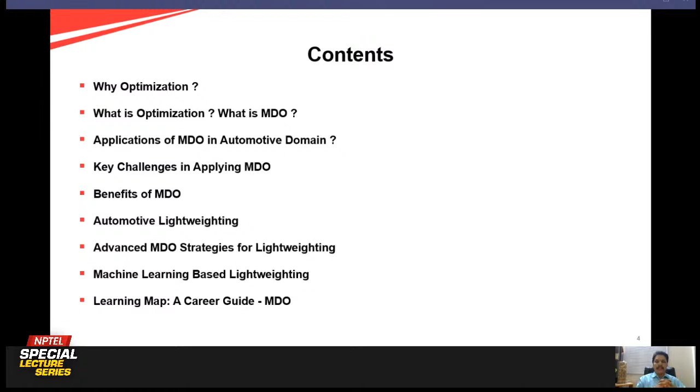Today, I will take you through these contents. We'll start with why optimization, what is optimization, and what is MDO. Then we'll go through applications of MDO in the automotive domain, key challenges in applying MDO, and benefits of MDO. Then we'll come to a very important topic on lightweighting - what is automotive lightweighting, and what are the advanced MDO strategies for lightweighting. Then we will see machine learning based lightweighting and the disruptions happening in CAE workflows because of advanced AI and ML based algorithms. I will end this with a learning map which will act as a career guide for anyone who wants to start a career in MDO.

So why optimization? Optimization obviously improves design quality. In the context of automotive design, when we're talking about design quality - customer perceived quality, fit and finish, drivability, ride and handling, durability, safety, so on and so forth - when we try to use optimization algorithms at different levels in the automotive product development cycle, we will come up with a product which will meet the quality requirements.

One more very important aspect in an industry context is meeting a project's time, cost, and performance targets. Because the automotive system is very complex, you have a lot of conflicting requirements. It is very important for us to optimize the systems considering various conflicting requirements, and we have to take decisions and trade-offs at different phases of product development. These decisions have a huge impact on time, cost, and performance targets. So how do you use optimization to ensure TCP targets?

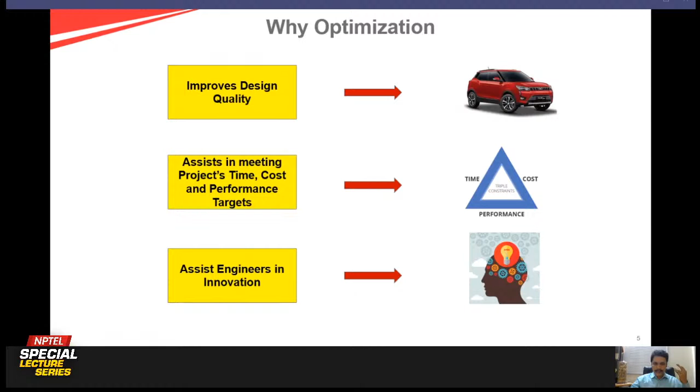The other very important thing is these optimization algorithms help engineers come up with novel concepts and innovative design solutions. Since the number of iterations will come down because we are trying to front-load optimization in the very initial stage of product development, engineers will have quality time to spend on coming up with innovative concepts. So, three things: improves design quality, assists in TCP targets, and helps engineers in innovation.

Now we will see what is optimization and what is MDO. Optimization is the process of obtaining the best results under given circumstances. In the context of automotive product development, given circumstances means circumstances in terms of timelines, engineering requirements, conflicting engineering requirements, and cost aspects. So how do we trade off all these things and come up with an optimal solution? The goal of a problem is either to minimize the effort or to maximize the benefit.

Now, for any optimization problem, there will be an objective function - let's say we minimize f of x, where x is a vector having a lot of design variables. In the context of automotive, this x can be a vector of thicknesses of components or material properties, so on and so forth. And then there are some constraints.

If you talk about automotive, these constraints can come up from various disciplines - let's say fluid dynamics. We want to reduce the coefficient of drag to improve the range of an EV or any IC engine powered vehicle. So there is a constraint from fluid dynamics.

You have to do a lot of fluid dynamic calculations. And then constraints, design verification plans come from durability aspect. You need to meet the damage, meet the fatigue life, and reduce the damage at critical locations. There are some regulatory requirements, and some occupant safety requirements which, as an OEM, we need to take care of.

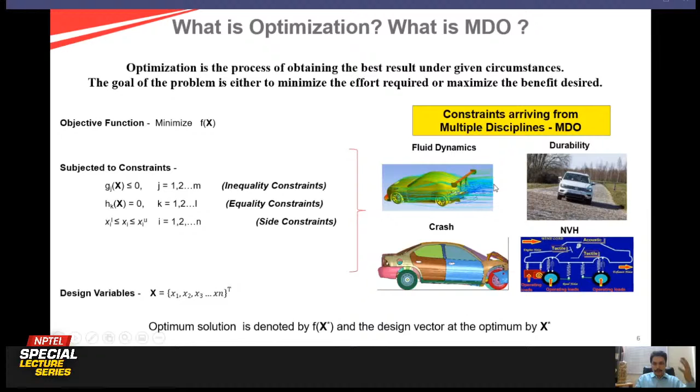If you see the physical interpretation of this, let's say that this is a hill, and somebody has to get to the peak. The objective is to find the highest point. And then you have design variables - the coordinates, longitude, latitude.

And then you also have constraints here. What is the constraint? Stay inside the fence - this fence is a constraint. Somebody can start outside the fence, and then the algorithm will start, find out the gradient, and then go towards the objective function.

Now the question is, the solution can be this point - the topmost point can be the solution when there are no fences, when there are no constraints. But given the constraints, your optimal solution would be the point where there is a red flag. So your objective function solution should meet these constraints. Typically, these fences are nothing but constraints which come from durability, from crash, from ergonomics, and so on and so forth. So this is how you can actually have a comparison.

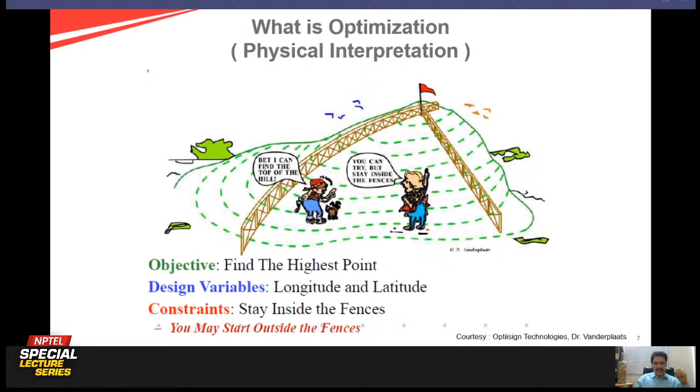Now I'll talk about application of MDO in the automotive domain. We'll dig a little deeper into why you need MDO and its applications.

So if you see suspension design - if I take a turn, I need lateral stability, and my suspension should be stiff enough so that I will not have stability or handling problems. But if you make your suspension stiff to improve the ride, it may result in lowering comfort. When there is a stiff suspension, vibrations are transmitted to the occupant. So how do you balance these two requirements - drivability versus comfort?

Let's say you are designing an HVAC system where your objective is to give thermal comfort to the occupant. There are vents, airflow, different depending upon ambient temperature, so you want to maximize comfort. But it also has an effect on fuel economy because the power consumption of various auxiliaries to drive the HVAC system - they consume power, consume energy, and that is fuel consumption. So how do you optimize this system?

Now if you look at the right-hand side, when I design a pillar - the A pillar is mentioned here - when I go for an aerodynamic requirement to reduce coefficient of drag, my A pillar angle with respect to horizontal should be as minimum as possible. Only then will the coefficient of drag be better. But then when there is a rollover, the crashworthiness will go for a ride because it cannot absorb the energy - it will directly transmit to the occupant.

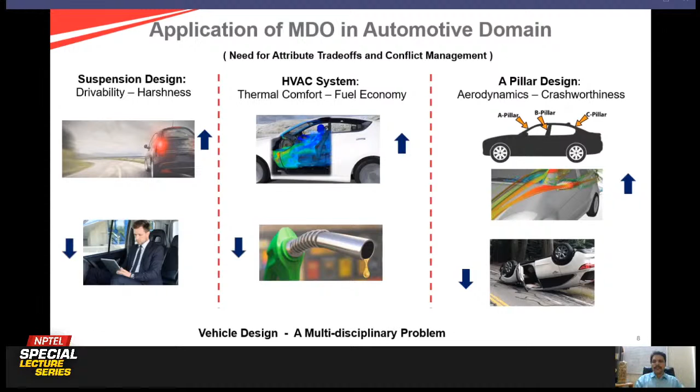We can also see certain other conflicting requirements like durability versus crash. You can see here durability - a tough terrain, real world usage pattern, and a lot of fatigue loads act on various structures of the vehicle. Now somebody has to meet this fatigue requirement, so the gauges should be thick enough - thickness of the structure should be sufficient, material property should be sufficient to minimize stress. But now for the structure to be crashworthy, it should absorb energy.

When it absorbs energy, the energy coming to the occupant will be less because the structure has absorbed it, and the G levels coming on the occupant will be less, and the occupant will be safe. So you need to have a structure which crushes, which absorbs energy.

Further, the thickness requirements are different for durability. So how do you manage this? And for NVH, the thickness requirements are different, or the geometry requirement or the material property requirement is different. So how do you manage this?

Another important aspect is, let's say you're coming up with an interior trim design, a pillar. Again, in the A pillar there is a seat belt, but there is no airbag. So in case of an accident, there is a chance that the head will impact the A pillar.

So what happens? A safety engineer will try to design some foam type structures or some elements which will break when there is a head collision, to absorb the energy and reduce the impact on the head. But all these things come at the cost of space inside the occupant area. So you will occupy space when you are designing this safe system, and there is some compromise on the ergonomics. So how do you deal with this?

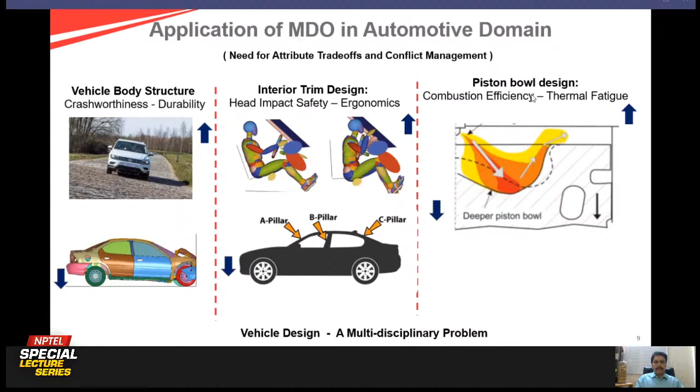So now let us look at key challenges in applying MDO. Now that you know what is optimization, what is MDO, what are the applications of MDO in automotive product development, what is the need for MDO, we will now look at what are the key challenges when somebody wants to really use this MDO concept.

First, phase one, when starting MDO: formulation of the problem requires multidisciplinary knowledge. So when somebody is trying to formulate mathematical constraint equations or the objective functions, he should understand all domains. He should understand the ergonomics, come up with the ergonomic design rules. He should understand the durability aspect, fatigue aspects, real world usage pattern aspects.

He should understand the regulatory requirements coming from crashworthiness, the vehicle dynamics requirements, the stiffness requirements of a BIW structure - longitudinal torsional stiffness to meet the NVH constraints - and also the noise part of it. So there are multiple domains involved. In the initial stage itself, an engineer formulating a problem should have breadth across multiple domains, along with specialization in his own domain - in algorithms and how to mathematically represent complex engineering problems. That's one.

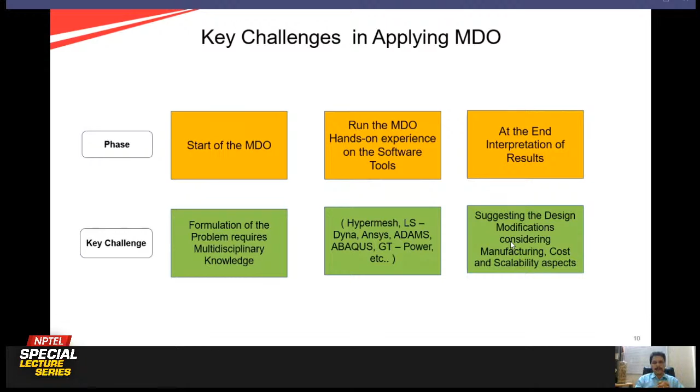Now, once you know the challenges in MDO, what are the key challenges in automotive lightweighting and the benefits of MDO? I'll tell the significance of lightweighting in the next slide, and in this slide how we can benefit from MDO. When trying to do lightweighting, there are a huge number of design variables in an automotive, and a huge number of constraints, which you saw in earlier slides. So MDO can handle this huge set of design variables and constraints.

Then there are highly nonlinear multi-physics problems, like crash problems. If you apply machine learning to come up with predictive models for nonlinear problems like crash or fluid dynamics, with the practically required accuracy for that design problem, you can use those algorithms in combination with MDO and reduce the time required to come up with the optimal solution. Highly nonlinear problems can be tackled easily this way.

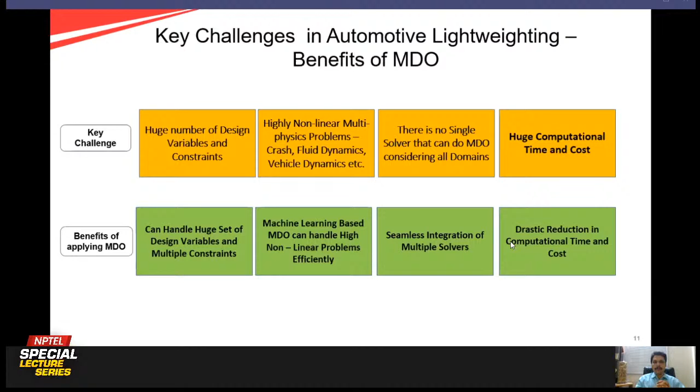Of course, there is no single solver that can do MDO considering all domains. So if you can come up with your own MDO solver that integrates all these software packages and runs them simultaneously, you can come up with the optimal solution. That's possible with a lot of MDO solvers. Huge computational time and cost can be saved when you use machine learning based MDO. We will see some case study based examples in the coming slides.

Now, when you talk about next generation technologies like electric, autonomous, and connected, one very challenging thing is range optimization. In Indian conditions and traffic scenarios, even in a city ride, there's a lot of traffic and signals, requiring acceleration and deceleration multiple times. So how do you manage the required range? For that, lightweighting is very critical.

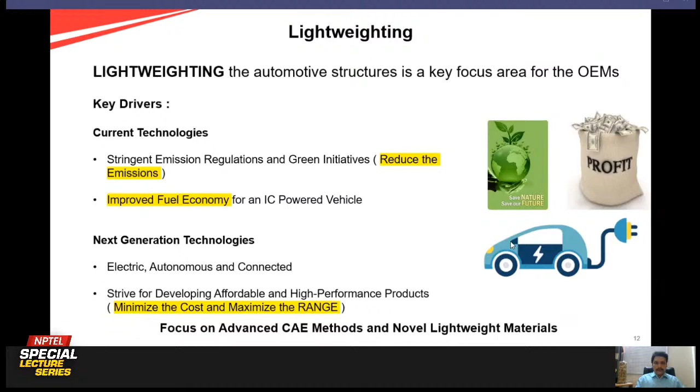Now, once we know this criticality of lightweighting, OEMs are taking it very seriously. There are various sources through which, in an automotive, you can achieve lightweighting. One can be a material focus, where you come up with high specific strength steels meeting cost requirements, composite materials, foam type materials, and distributing materials at different locations based on the CAE solution. So you can leverage the material, and also come up with various joining techniques.

Let's say you go with an adhesively bonded joint for a hat section—there are two hat sections you want to join. You can either spot weld or have a bonded joint. Say in a bonded joint the crash worthiness is better; then you have potential to lightweight. So joining techniques also influence the lightweighting aspect. Then there's engine downsizing—when you downsize an engine for a particular application, there's definitely potential for lightweighting. But when you downsize an engine, you also need to take care of other requirements like durability and NVH, which arise because of the engine power rating.

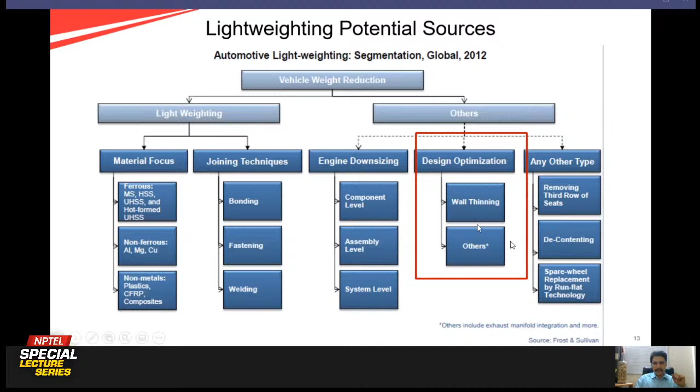The focus of this talk would be on design optimization through wall thinning, size optimization, or shape optimization, topology size optimization. This is purely through CAE and through size optimization, design optimization using CAE. There are other types I won't get into, they're slightly different. So the focus of this present talk would be on wall thickness, thickness size optimization.

Typically a vehicle weight distribution, if you see, about 34% of the weight is on body systems. And if you see DAC systems, electrical, trims, thermal systems, powertrain systems as the other spread. So the sweet spot or the low hanging fruit for lightweighting would be body systems, BIW structure.

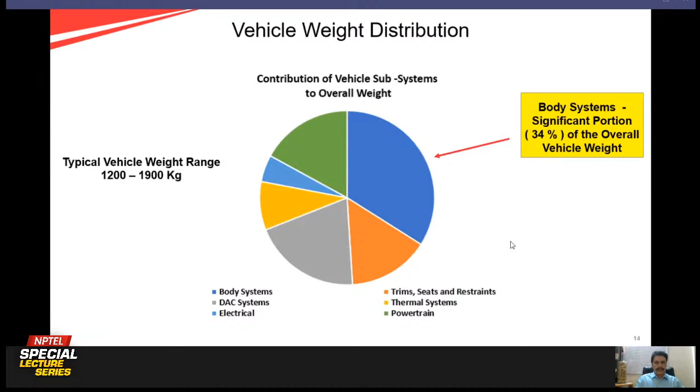So what I'll do is try to show an example on automotive lightweighting, and I will explain various CAE methodologies which are used, and how the methodologies are evolving. This is a simple problem, because in automotive there is a very complex problem with a lot of design variables. For simplicity, I took only 3 components: bumper beam, left front rail, and left shotgun.

These thicknesses T1, T2, T3 are the design variables, and the objective function is minimization of mass. Constraints in real life can come from various domains, and a lot of design verification plans are in place. But for simplicity, I took 3 constraints here: one coming from NVH, natural frequency of the system, one on fatigue life, and one on peak deceleration.

Peak deceleration less than 43 G. This is a safety constraint. If the peak deceleration coming on the occupant is less than 43 G, the occupant is thought to be safe.

And these are the finite element models, one corresponding to NVH, one corresponding to durability prediction, and another corresponding to crash. So this is the background. Here we have only three: NVH, durability, crash.

NVH is fairly a linear problem, and even the computational time will be less when you try to solve an NVH problem. Durability analysis can be linear or non-linear. When you actually model the material non-linearities, it becomes non-linear. But if you model well within the elastic limit, then it's straightforward, and durability will also take less time to solve using computation, even at a full vehicle level analysis.

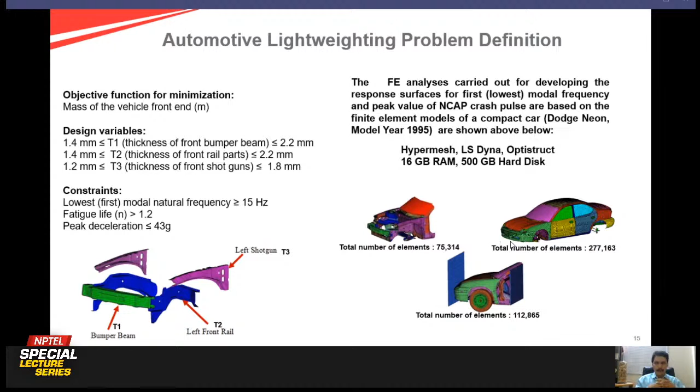So how do we do this? There are various ways. I will start with response surface based method, which I know most of you are aware of. And then we'll go to a practical MDO, which Professor Anindya Deb and myself came up with when I was at IISc. Professor Anindya Deb was at that time my research supervisor.

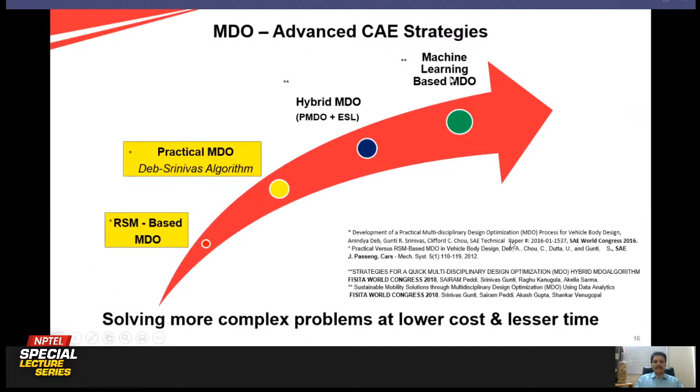And then we have hybrid MDO, which is a combination of practical MDO plus equivalent static load method. Equivalent static load method is what Genesis does. I will talk about this. And then we have machine learning based MDO. So I will show you how we travel from RSM based method to a machine learning based method, and how it will affect the project's time, cost, and performance.

Just thought, not so mathematically rigorous, just thought to represent a response surface. We all know the simple response surface, let's say T1, T2, T3, three-dimensional. But in the real world, response surfaces are multi-dimensional, and it's very difficult to visualize. Let's say you have a response surface.

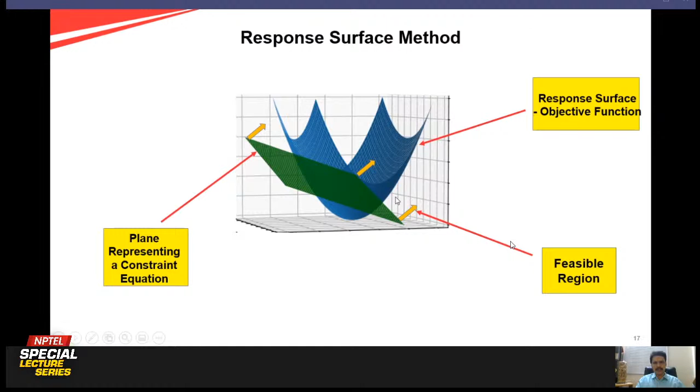This is typically the response surface method. So how is this response surface method applied in an optimization problem, automotive optimization? You first start with a populated DOE, design of experiments, and you do NVH, crash and durability for all the DOE points.

When you do NVH, crash and durability for all these DOE points, you can come up with predictive models. You can come up with correlations, regression-based equations, and then use those regression-based equations with an optimization solver to come up with an optimal solution.

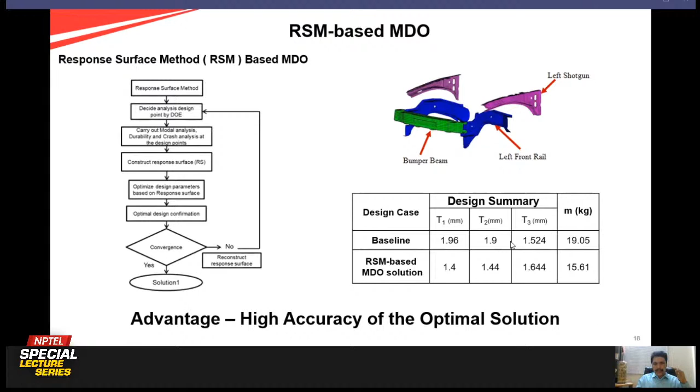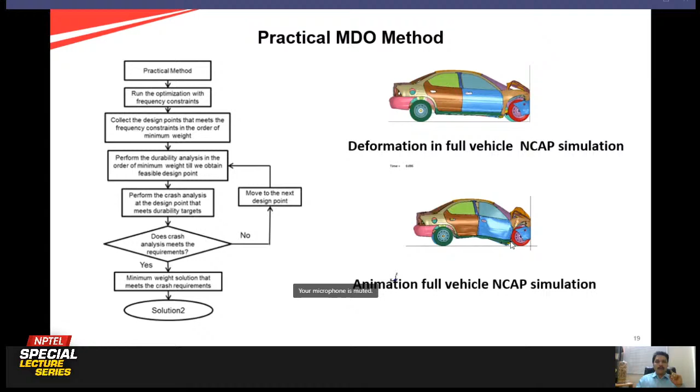Now, with this background, I will compare this method with the practical MDO. What practical MDO does is it doesn't create any response surface. What it does is, within the design space, we populate 175 design cases.

Let's say we populate these. For these 175 design cases, we do NVH first because NVH is a linear problem. Then we apply the NVH constraints and figure out which cases are meeting the NVH constraints, and list those out.

Once the NVH constraint is met, then we run a durability analysis, which is also a fairly linear problem. Once you do the durability analysis, and if the case meets the durability life, then we do crash analysis.

After doing the crash analysis, if it meets the crash requirement, then we stop there. If it doesn't meet the crash requirement, then we go to the next step: do the durability, then do the crash.

So what happens is there is no response surface, and no need to run the crash analysis for all the DOE points. What you essentially do is sequentially NVH, durability, and then crash. And then you are minimizing the crash runs from 107 to just 7 runs.

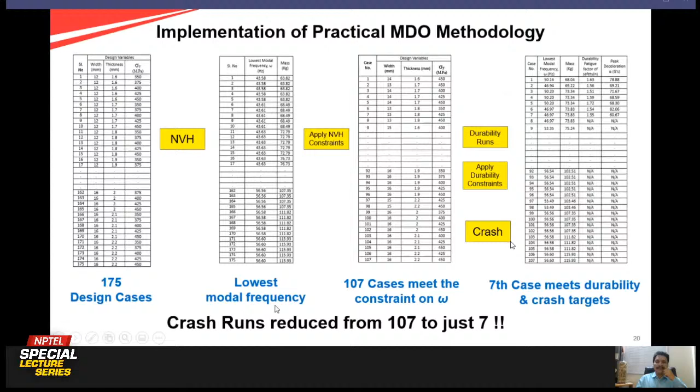So how do you do that? The 7th one is meeting the requirement. So what happens is the optimal solution comes out to 16 kg from the baseline.

So if you compare the solution accuracy and the time required, on the left-hand side you can see the optimal solution is more or less close, 15.61 and 16.07 kg. And the time required to come up with this optimal solution, 62 hours versus 14 hours, there's a drastic reduction in computational time in the practical MDO, which doesn't use any response surface.

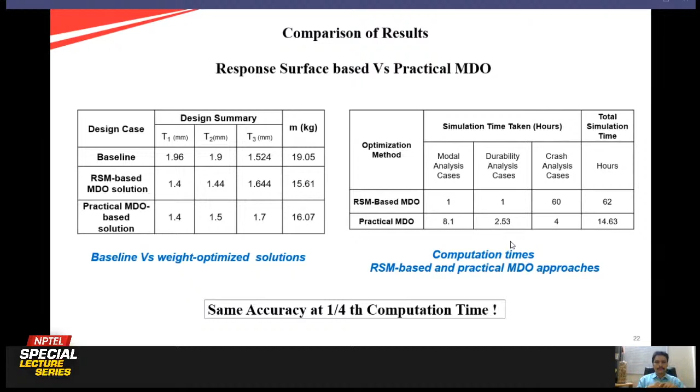So there is a one-fourth computational time reduction. Let's say full vehicle analysis is taking one month for running all the DVPs. Now if you apply this practical MDO, only one-fourth of that time, one week, instead of four weeks.

Now we will see how hybrid MDO works. Hybrid MDO is a combination of practical MDO, meaning you do NVH first, then durability, then crash. Along with that, even for those few crash analyses, you use an algorithm called the equivalent static load method.

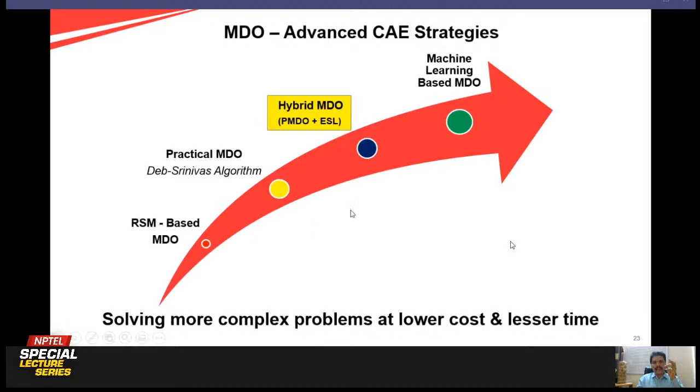What it does is convert the nonlinear problem into linear. It will calculate the equivalent static loads which are creating the same displacement field. Then it does the optimization in the static, linear static response optimization. Then it will go back and map to the nonlinear domain.

And this is very powerful. Genesis is the tool, and OptiSign Technologies in India is driving this particular tool. This is having huge benefit in terms of time saving for full vehicle analysis.

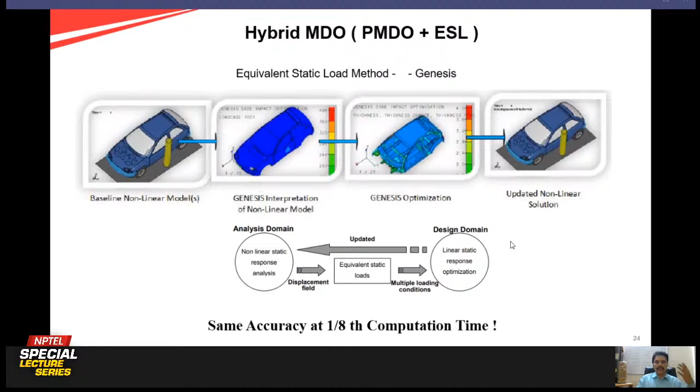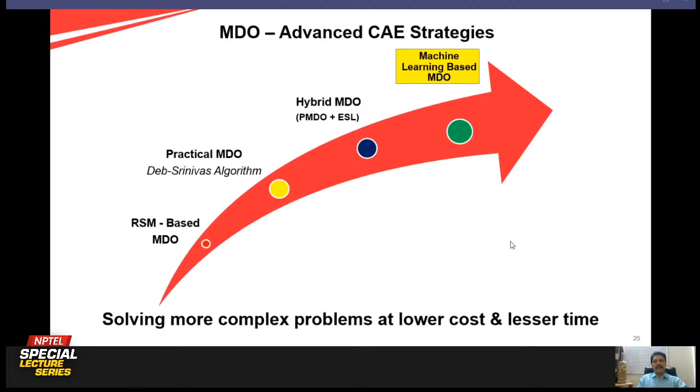Now, so we have seen RSM, we have seen practical MDO, and we have seen the combination of practical and ESL, the hybrid. Now let us see how machine learning based MDO can help us get optimal solutions in a very short time.

So I took a slightly more complex problem. Here we have thicknesses corresponding to many components in an automotive structure, T1, T2, and so on up to Tn. This is the thickness range. The objective function again is minimization of mass, because we are talking about lightweighting. Then we have constraints coming from IIHS offset requirement, natural frequencies of the structure for NVH, and the maximum von Mises stress on the component should be less than a given value.

So with these constraints, design variables, and objective function, if we try to solve this problem using machine learning based methods, how should we go about it? Before going to the actual problem solving, I'd like to spend a minute or two on how these constraints come about, what kind of experiments we do to arrive at them.

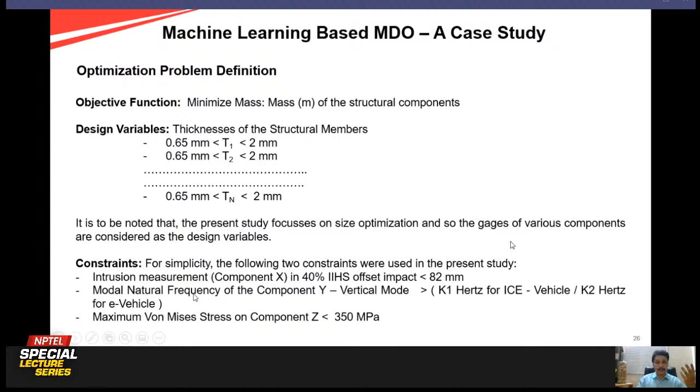Let's say you are developing an EV platform and want to convert an ICE engine vehicle to an EV platform. We do experiments on a vehicle which has a motor replacing an IC engine. We put microphones and try to get the noise levels, running at different speeds to see the noise levels at different speeds for the IC engine version versus the EV version.

Then we find out if there is any potential to reduce the stiffness of the structure in the EV version, without compromising on the perceived quality with respect to NVH. Why do we want to reduce stiffness? Reduction in stiffness will lead to substantial reduction in the weight of the structure.

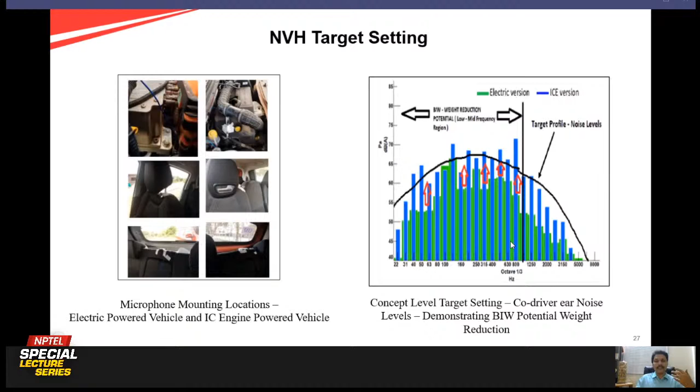So then what we do is try to change the constraint equations. This is how constraints with respect to frequency or stiffness targets go into the algorithm. A lot of experiments have to be done for each and every constraint, and these constraints are essentially design verification plans, which we call DVPs. There will be a huge set of DVPs for various domains.

And now we have NVH responses, crash response, and accelerated durability test response. So we have formulated a problem, and from the simulation we arrive at the responses. We run simulations at different DOE points, 200 data points, and get the responses of NVH, crash, and von Mises stress, because we need equations for these in our constrained optimization.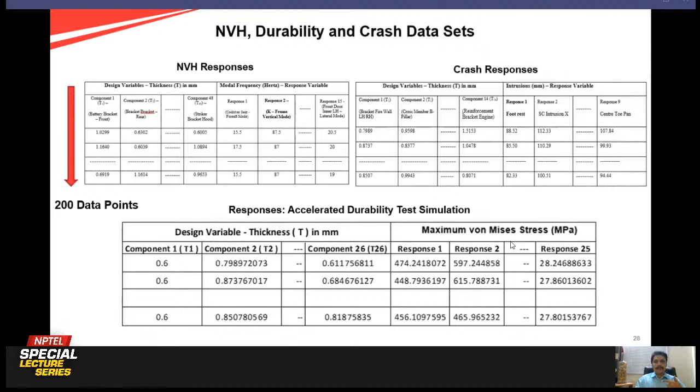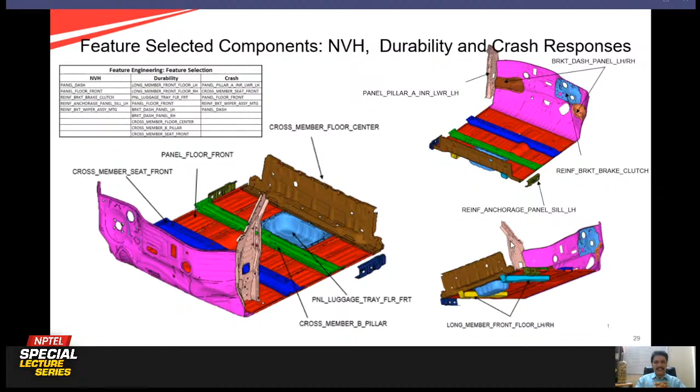Once we get the simulation runs, we develop predictive models using various methods. What we see in this slide is the components which are very sensitive to NVH, durability, and crash. These are the components sensitive to all three domains.

For those components, these are the predictive models which came out from the machine learning, and these predictive models will go into your optimization solver as constraint equations. Like this, the constraint equations can be many. In this case, we have three constraint equations because we are looking at three domains.

Considering these three constraint equations which came from the predictive model based on machine learning, and considering the objective function and the design variables affecting these three domains — which, as we saw, is the thickness of various components — you can run the optimization solver and minimize the weight.

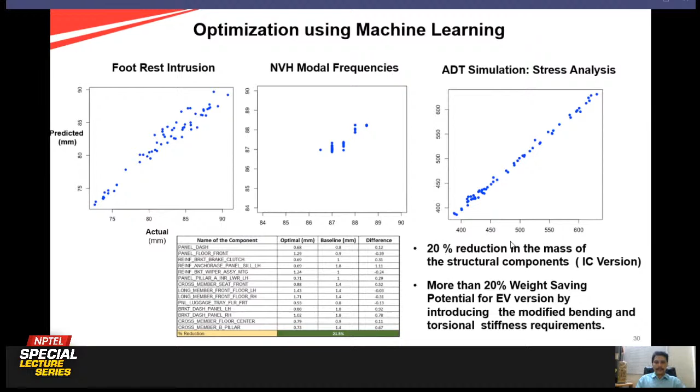In this case, there is a 20% reduction in the mass of the structural components for the IC engine version, and more than 20% potential weight saving for the EV version, because there is potential to reduce the stiffness of the structure without compromising on perceived quality, based on the experimental results.

And the last part of my talk today is how dimensionality and volume reduction techniques, machine learning based techniques, can drastically reduce the simulation time.

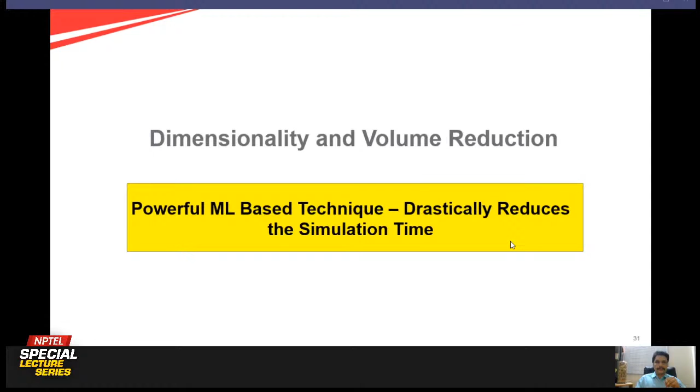Okay, let's go back to what we saw — there are 200 data points in our previous analysis. I took crash analysis as the key, because crash analysis is very critical, and if you try to reduce the number of crash analyses, we are in business. NVH and durability are slightly straightforward because they are linear. Now take crash analysis: there are 200 data points and 14 design variables, and various responses — this can be intrusions, and so on.

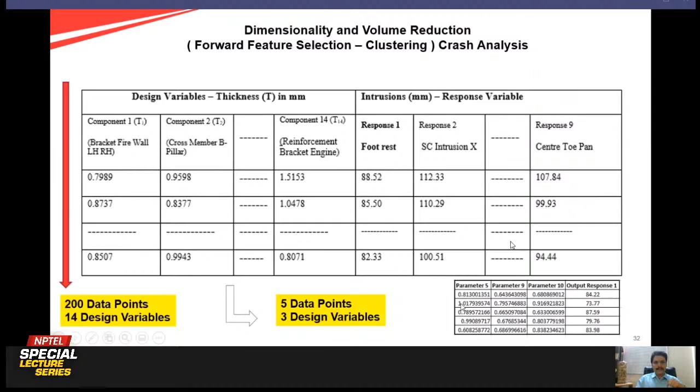Now, if you apply these forward feature selection and clustering algorithms, those of you familiar with machine learning will understand them, you can come up with 5 data points from 200 and 3 design variables from 14 for this response.

Considering just 5 data points and 3 design variables for that response, I get a predictive model. I use this predictive model and compare the results with the predictive model we got from 200 data points and 14 design variables, plotting actual versus predicted, where x-axis is predicted from these 5 DOE points and 3 design variables, and y-axis is from the 200 data points and 14 design variables.

You can see if you consider 5 clusters, your error is 15%, so your accuracy is 85%. So you can use these predictive models without running the DOE crash runs for the rest of the DOE points, and reduce the time. For this given problem, 133 days can come down to 3.3 days, even when you account for the error.

This is when you try to use the potential of these machine learning algorithms on the data sets generated in the past CAE data sets. So there is a huge reduction in time to solve the full vehicle analysis.

So we saw what is optimization, what is MDO, applications of MDO. Then we saw the challenges in applying MDO, and the benefits of MDO. Then we took a case study and saw various algorithms like RSM-based method, a practical MDO, and hybrid MDO, where we talked about the ESL method.

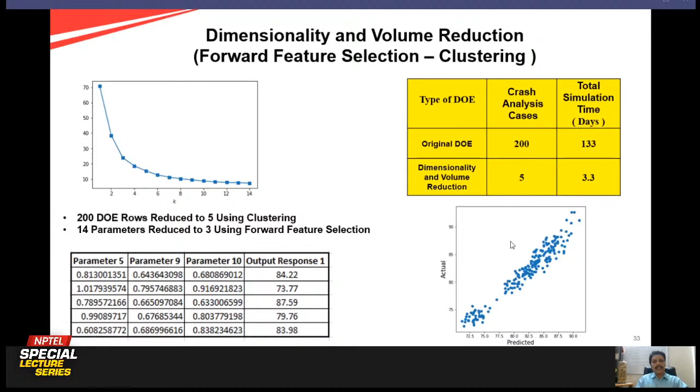Then we talked about machine learning based MDO. With machine learning based MDO and equivalent static load methods, focusing on reducing crash analysis timelines, you can do the optimization problem in a few days. This is a disruption happening, and the same thing can be applied to many other domains like CFD and so on.

My last slide is on, if somebody wants a career in MDO, what all things he should look for. Suppose somebody is a beginner, he should have a strong foundation in mathematics, engineering mechanics, solid mechanics, finite element method, computer programming, and also understand engineering optimization and how to use basic CAE tools.

Suppose you already know these things at the college level, you have electives and you are perfect in these areas. Then what you can do is start working with industries on various problems pertaining to crash, durability, NVH, vehicle dynamics problems. You can engage with industries and solve their pain areas, take up their pain areas, and then get into these areas.

CFD areas. So for a practitioner, what is important is he should have breadth in all the domains. Then only can he do the formulation properly. And then you should also get into advanced finite element analysis, because a lot of nonlinear concepts are taught there. And you should get into advanced CAE optimization tools like Genesis, and so on.

Then for an advanced practitioner, what is important is you should try to see how can you come up with various strategies on MDO, mix and match of multiple things without compromising on accuracy of solution and being very fast. Can we use analytics? Can we use ML-based models? Those kinds of thoughts we should get into, and then develop a lot of case studies in this space.

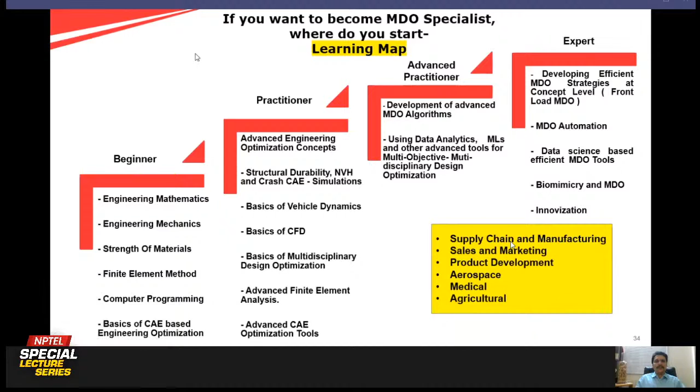And this MDO can also be used in other industries, like solving supply chain problems, manufacturing problems, sales and marketing. All product development companies can use MDO for their problems. So aerospace, medical, agriculture, the list can go on. So this is a very powerful technique, and that's all what I have with me.

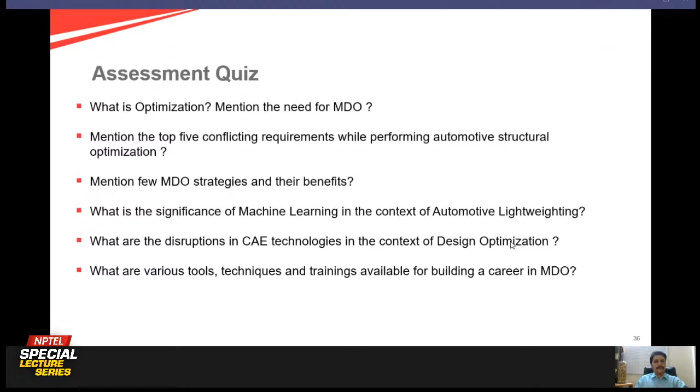Hello? Hello? So hello, can you hear me? I think I'm audible. Can I answer some of the questions? Hello? Okay, let me answer a few questions.

Can I apply after completing bachelor's degree in BCA? Yes, because optimization is very much taught in computer science courses, and you can come up with various algorithms, where parallel computing is required when we are trying to solve these nonlinear problems. And then for your own domain, you can apply these MDO concepts.